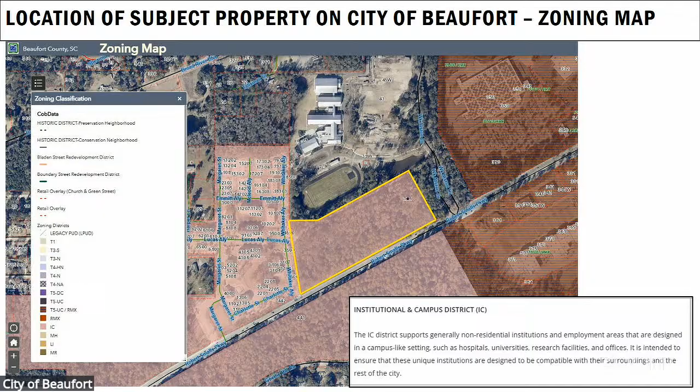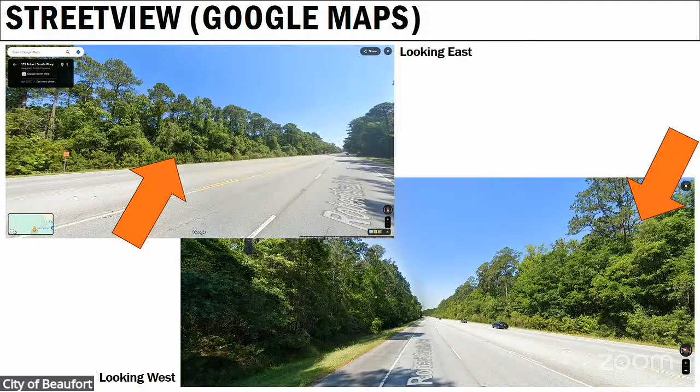Looking at the overall aerial from Google Maps, you can see it's undeveloped, still wooded in its natural state. To the north is the Robert Smalls Leadership Academy by Beaufort County Schools. To the west is W.K. Alston Drive, the primary access drive to the Academy. You see 4000 Margaret on the east, the Walmart on the right-hand side, and across Robert Smalls Parkway is Beaufort Station. Looking at the street view, it's pretty much undeveloped and wooded still.

Urban centers, by definition in the comprehensive plan, are intended to accommodate regional and community businesses and limited light industry. You can forget the light industry portion since we're in IC. You can also see compatible zoning districts under this urban center designation - the second most intense land use would be RMX, the T5 UC districts common along Robert Smalls Parkway, for instance Beaufort Station is zoned RMX T5 UC. So basically it is compatible with what the comprehensive plan envisions as land use along that corridor.

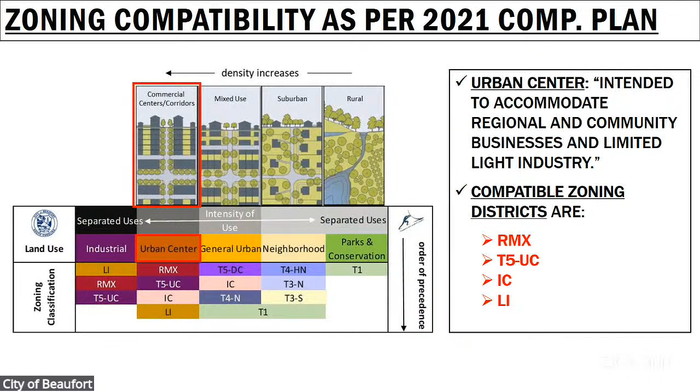Let's delve into the conceptual site plans submitted by the applicant. You can see the overall property boundaries here, and today's request takes up roughly, maybe not even a third, of those 14.4 acres. You can see the freestanding emergency department and the patient care clinic - the emergency department on the south, and the PCC, the patient care clinic, on the north. You can also see outlines of the access road system.

It's going to have direct access off of Robert Smalls Parkway on the south. The applicants, the property owners, will also create what I call a spine road, a connector road on the north side of the property, which will connect 4000 Margaret on the east with WK Alston on the west, as a secondary access road to the north.

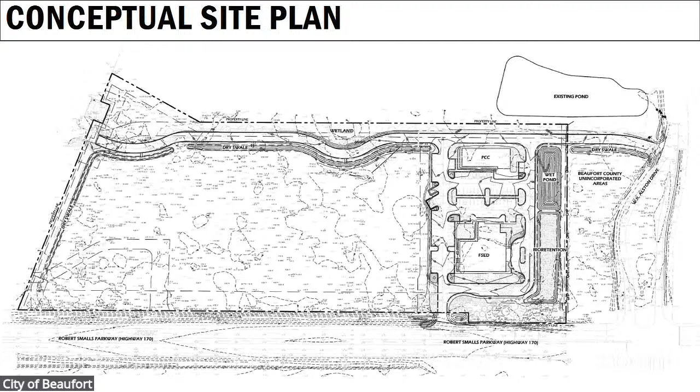There will be some questions about that because so far we haven't been told, or the applicant hasn't specified, that there is an easement or access easement, because that sliver of land you see on the east next door is actually part of Beaufort County School System. So Beaufort County Schools owns that sliver of land between the subject property and WK Alston. They're going to have to go over that, and I'm sure the applicant can specify that later on. Just to point that out, to kind of hone in on the actual project here.

Also, you can kind of see the landscaping that's proposed with it. So you see the two buildings. The southern building, the emergency department, is not faced towards Robert Smalls Parkway—it's actually facing north, towards the patient care clinic on the north. That's where the main entrance will be. In between those two buildings is where you have your parking, as well as on the west side of it. So parking is going to be on the side and in between those two buildings.

On the eastern side of this portion that will be developed, you will see retention areas and a wet pond for stormwater management purposes.

Also, what you can see here is the frontage buffer along Robert Smalls Parkway, which with our latest revisions to Chapter 5, now has options with the buffer type they can choose from. It used to be a 50-foot buffer. Now they can choose between option 1, the 50-foot, or option 2, the 35-foot, which is the scaled back buffer depth with more planting. The applicant has stated they are going with option 1, the 50-foot buffer, which has been commonplace along Robert Smalls Parkway. So that's what it's envisioned to look like.

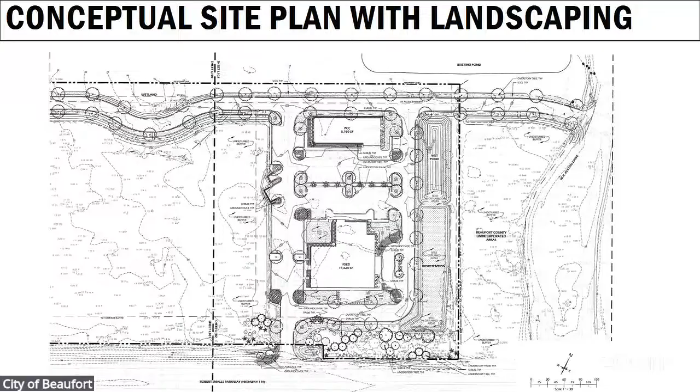This chart again states, under our now revised section 5.4.2, the front buffer requirement for this location. They are going with option number 1, as I just stated, which has more depth but entails less planting of overstory and understory trees and so forth, as you know.

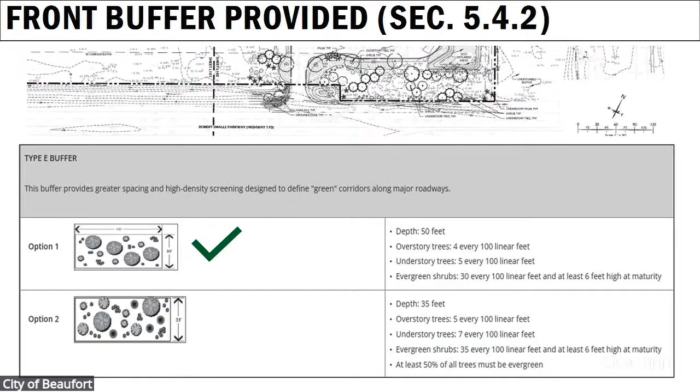The tree canopy coverage is also a new item we've introduced in our Chapter 5 revisions. They have outlined their existing canopy by the specimen landmark trees they are preserving on site, as well as the street trees and the landscaping that will be planted on site.

Looking at the canopy coverage for the 30% minimum requirement for commercial projects like this, they actually exceed this by far, because their calculations show a 55.2% tree canopy coverage percentage.

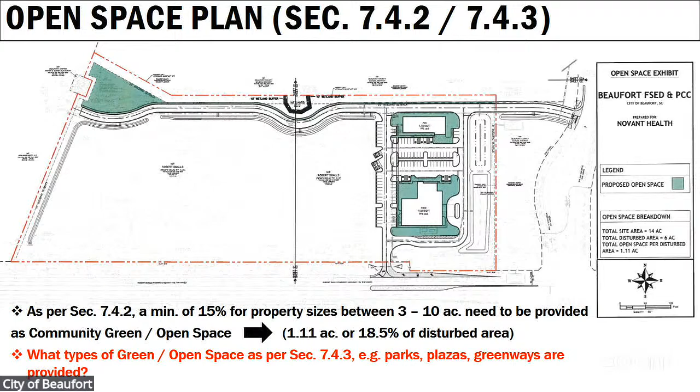The only thing missing, and please keep that in mind, is that we don't have any other specifications about the types of community green space or open space that is provided for. We only see where it's provided for, the location of such.

Going further into details, with the sketch plan requirements per our new section 7.5.3, we have 5 criteria we look at for sketch plan submittals: a street plan the applicant needs to submit, a community open space plan which I just talked about, a requirement to show the pedestrian network meaning location of trails, not only access roads but a trail system for pedestrians and cyclists, and they need to clarify their zoning as well as their design, including conceptual building design and massing.

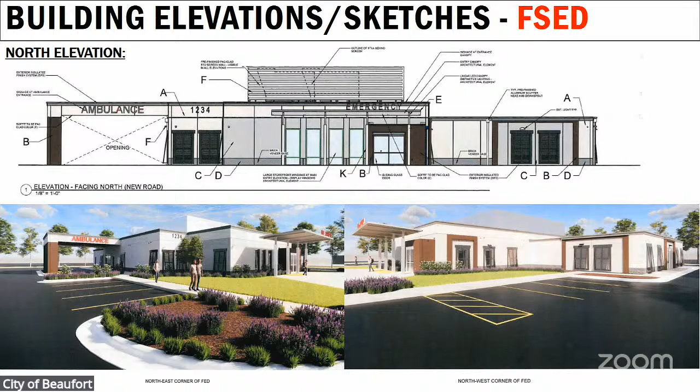From what our architects at Emitters told us, our understanding is that these buildings will be built basically from pre-manufactured elements - building elements put in place and assembled on site, so they're put together made out of pre-manufactured elements. What about precast concrete? That's our understanding, yes. You can ask the applicant, but I believe that's the case.

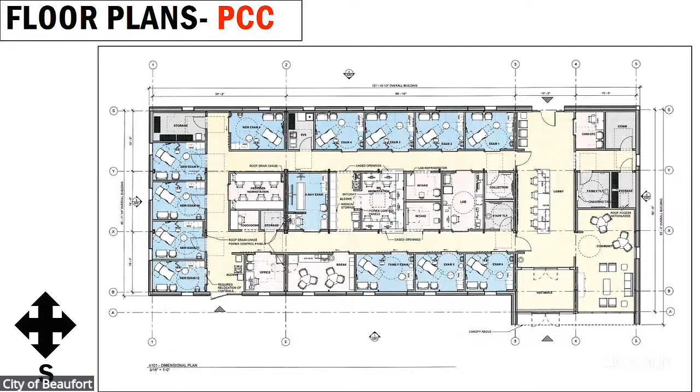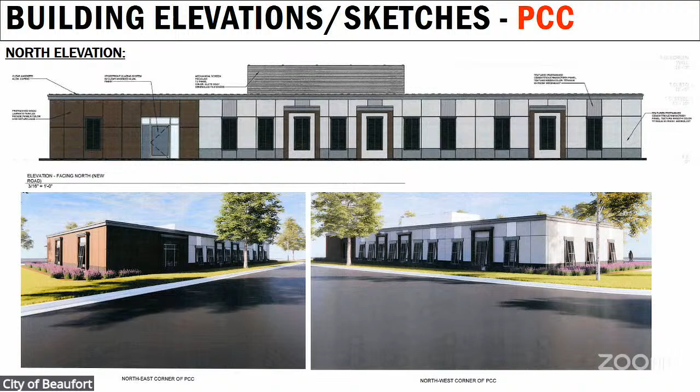So they change the northeast corner, which is kind of that brownish facade color, and it changes over to that more white, gray, white checkered pattern on the west side. The windows have Bermuda shutters in front of it. You can see that clearly here on the northwest elevation.

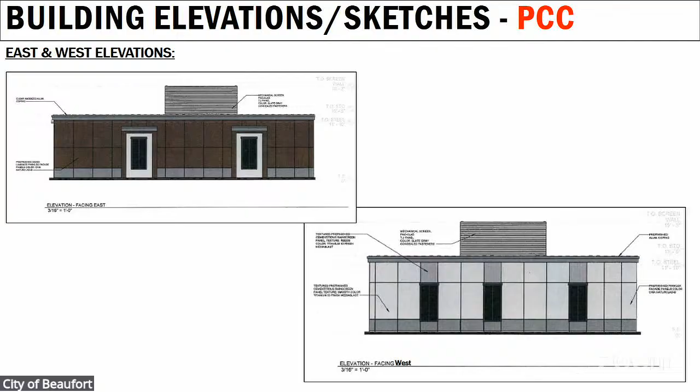So the east and west elevations, the side of the buildings, look like this. On the east side it's more brown, not very crazy architecture. Then on the west you see more of that gray, gray panels over the windows with the Bermuda shutters, and then you've got the white.

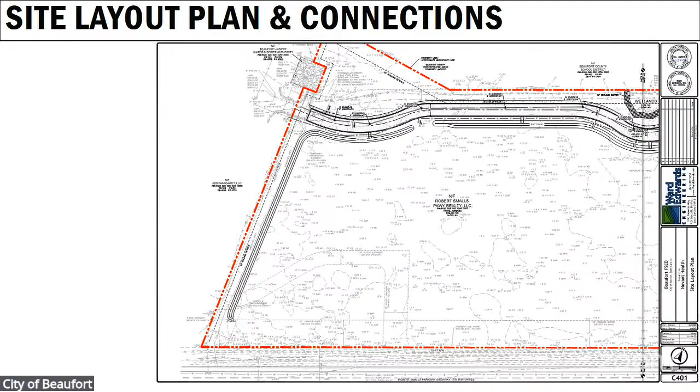towards WK Alston, which is something that we like to see. We like to see connectivity. We like to see, if there's street stubs present, that new development ties into surrounding communities and developments that are already in place. So they are doing that, which is very good.

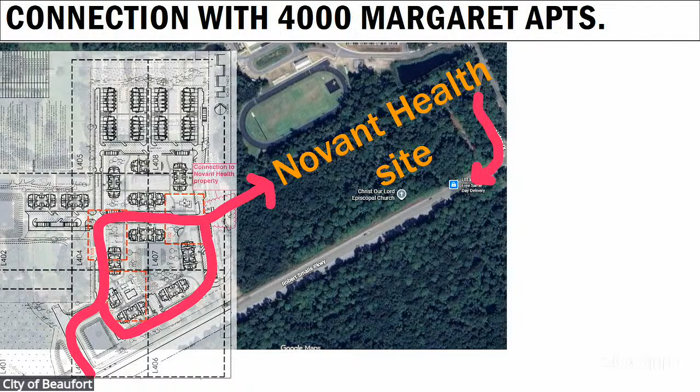Another look of what that would look like here: the apartments here on the north, and then the new development, the healthcare site on the south, with the pump station there on the right.

Basically, this is Matthew Michaels, the leading engineer for Beaufort Jasper, and this pretty much confirms that there's capacity there. Yeah, I think the other issue is the letter itself in the body only refers to the freestanding emergency department. It does not refer to the other building.

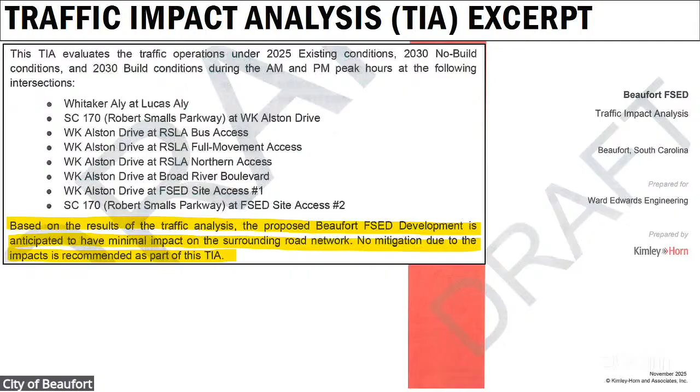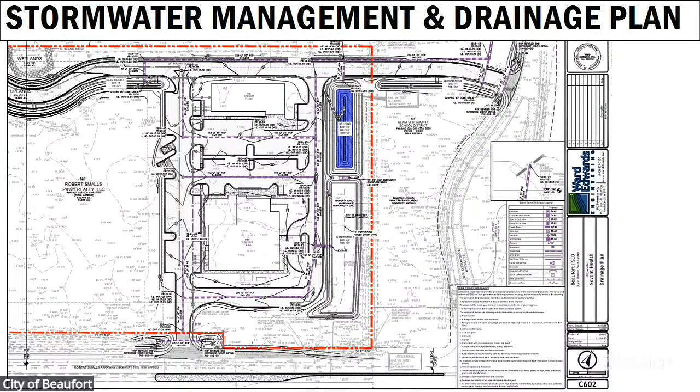The utilities, the water and sewer look— Can I ask you a quick question on that? Yes, sir.

So the bioretention overflows to the adjacent wet pond via an emergency weir at an elevation of 18.75 feet. The wet pond stages to a maximum elevation of 18.58 feet, which is below the emergency weir elevation. Therefore, it will not backflow or saturate the bioretention. So flow is directed towards the north and then goes out. If that overflows, it goes into the control drainage structures.

Yeah, that's a really steep slope in there. I don't know, I really didn't—usually it's stabilized, but it's only a sketch plan. The specifics—we work with Jason Hedrick when it comes to stormwater management, and we had provided the applicant with comments, which they basically elaborated on, and I'm sure they can do that better afterwards as well.

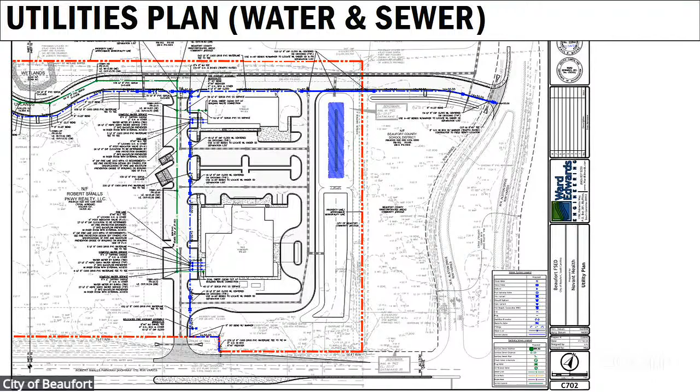But this just highlights how that is going to take place, as well as the water and the sewer, which you can see here in the utilities plan. As I stated, the sewage will flow towards that pump station at the northwest corner towards 4,000 Margaret and will tie into there. The water line, shown here as the blue line, follows the spine road, the connector road, bringing the water from WK Alston and taking it towards 4,000 Margaret, tying it into their new facilities to the south.

Last but not least, we come to the finding of fact section. We analyze four facts. Number one is the land use mix within the project, whether it conforms to Beaufort zoning and the comprehensive plan, which I showed you in the beginning—the future land use map and its goals and policies. Yes, if that checks off, both the comprehensive plan and the current zoning meet what we would like to see within the IC zoning district as a healthcare facility along that location.

Number two, the sketch plan is consistent with the rationale and criteria set forth in this chapter, the city's comprehensive plan, and the civic master plan as amended.

Looking at those, there are some items that we haven't really seen or would like more elaboration on. One of those, if you look at Appendix C of the Beaufort Development Code, studies what kind of desirable street sections you would like by typology, and gives a description of Robert Smalls Parkway and what the city would like it to be developed to when it comes to development along that corridor. One component within that street section is a multi-use path for both cyclists and pedestrians.

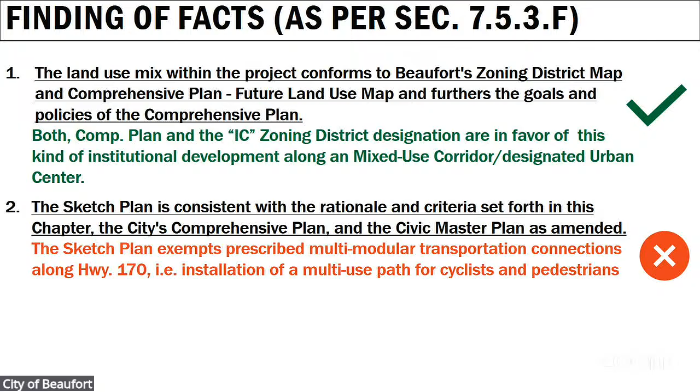So we have not seen any of those multi-use pathways along Robert Smalls Parkway in this sketch plan. It would be nice—I will refer to the applicant on that—but that's one of the items they have not really touched on.

Number 3: preliminary traffic, open space, parks, utilities, pedestrian design—are those adequate? Are they functional given the planned capacities of each system, and do they meet the standards found in this code? There are items that have not been provided for, as I just stated: the multi-use pathways and connectivity to other means of transportation, like pedestrians and cyclists, are not necessarily all there, or may not be adequately provided for.

That's also true of the Spine Road potential—not only connecting 4000 Margaret with WK Alston, which is basically an access road to the Leadership Academy school, but providing that not just as a transportation road for cars, but also maybe highlighting more access for cyclists. What about trails, greenways, and so forth?

The other item I highlighted was the missing easement clarity. Is there going to be an access easement for that small section to tie the Spine Road into WK Alston? That is still unclear—we don't know as of today. I'm sure the applicant is able to elaborate.

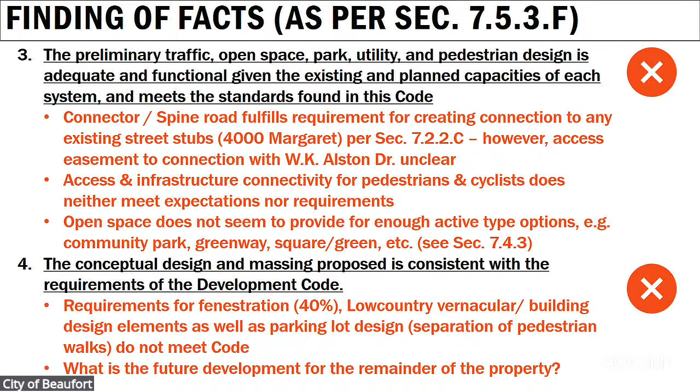Open space: the open space plan doesn't really show any decipherable types that have been chosen. For instance, is there any active open space provided, like community parks, a square, a green, or maybe a greenway as an open space type for this development, in conjunction with the residential and schools and so forth.

Number 4, finally: the conceptual design—is the proposed massing consistent with the requirements of the development code? Well, the massing is underutilized. Both are just one-story buildings, which is fine—if they don't want it to go up, then they don't want to go up. But looking especially at building design criteria, what we always like to look at is the fenestration.

What do they have to provide for? Well, 40% in the conventional district for IC. The transparency does not necessarily meet that criteria. We would also like to see 40% on the street-facing facades—any facades that are street facing and prominent should have that 40%, and it should be true fenestration, transparent fenestration that allows an interactive relationship with the building. We don't really see that. So if I'm in the exam room with the doctor, it should be an open window.

I mean, 40% is about half of the building wall. How is that going to work with a building where you're going to have people being examined by doctors? I'm just standing there pointing it out. But that's a good take, a good argument. At least I understand what the code says, but in this instance it doesn't seem to make a lot of sense. No, of course. Anyway, I'm just putting it out there, right?

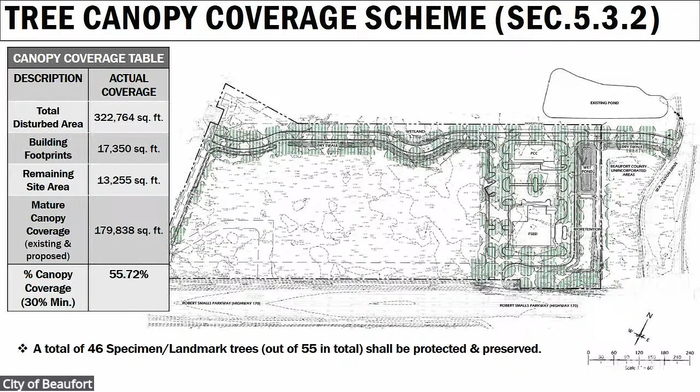Any other questions? Has the connector road from this site to the WK, has that been dedicated? We don't know. Is that now part of this project or is it not part of this project?

Well, the connector road is part of the project, so they are proposing to connect WK Alston on the east with 4,000 Margaret on the west to have that also as a secondary access. They're proposing it, but do they have legal right to do that? I think from what he said earlier, the staff doesn't know. No, we don't.

Okay, I just wanted to make sure that's still the case. So is that still up in the air? You just don't know? I'm sure the applicant can probably talk towards that.

Okay, and one last thing, and I don't know that we have this implemented now, but we had asked to try and get some type of a look at a master plan where you take this site and all the other sites and kind of look at a master plan of what the impact is of this site combined with all the other sites. And I'm not sure if we've accomplished that yet with everything.

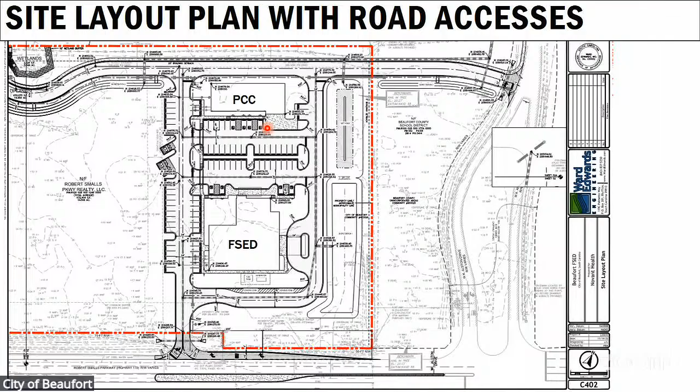Christopher has provided you with a list of a lot of comments about this from the technical comments on the addendum, and you'll notice there were comments about what Benji stated. I think the important thing is you see the overall - this is conceptual, right? So there are some issues here that you're seeing, but we're getting into some specific details that a site plan would have to lay out. But the goal of this is to tell them, hey, looking at this conceptual plan, the way you're orienting this building and its massing, its scale, its relation to Robert Smalls Parkway is not working for us.

Hey, your parking lot design is not working for us. Instead, this is more conceptual - let's not get into the fine grain details, let's think about it in general. I agree, I just wanted to say that because that's the goal of this meeting. So, sorry - why don't we close this and open it up to allow the applicant to make their presentation?

Good evening. I wanted to thank the Planning Commission for having us this evening. I'm Adam Pegan, I'm the Senior Director of Planning.

Could you say your name again? I couldn't hear it. Oh, I'm sorry, Adam Pegan, I'm the Senior Director of Planning. How do you spell your last name? Pegan, P-E-G-A-N. There should be a sign-in form for you to sign in and put your name in. Yes sir, thank you.

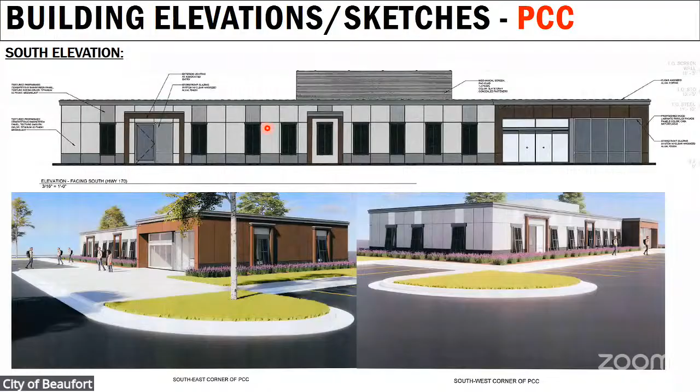It's an interesting concept to me, but I want to make sure we're helping to make it work right. You actually have the same... I'm not as concerned about your urgent care or the emergency room, more concerned with whether this has been in operation in other locations and been successful, is what you're saying.

Yes sir, like I said, just down 170, Tidewatch Freestanding Emergency Department, we've been operating since 2019. Oh okay, well that's a good amount of time. That's real interesting to me.

Mr. Chairman, I have one more question. What is the relationship, if any, between the patient care center and the freestanding emergency room? Is the patient care center providing follow-up care for people seen in the emergency department? Is it primary care? Is it urgent care? What is it? Yeah, so the intent is it's an office that can be used for a variety of different things.

The intent right now is to have it as primary care. We find that a lot of folks in the area don't have a primary care provider. We've recruited a number of providers recently and plan to recruit many more. Oftentimes we see patients where their first interaction with healthcare is unfortunately at an emergency setting. So if they would be willing to choose us, we would have a location across the street able to take care of them. But it is intended to improve access to healthcare in general.

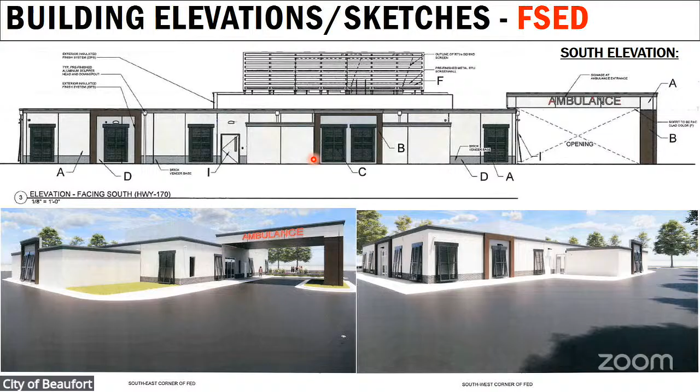Floor plan back up, please. Service yard is right here. So the service yard is facing Robert Smalls Parkway. This is the south elevation. So the service yard would be in here, okay? Right here. Could you put the floor plan up?

So this is facing south up here. This is the service yard area. So Robert Smalls Parkway is up here. It's turned around 180, so...

I personally think that's a great idea to move that front entry toward Robert Smalls, kind of in the corner of that Robert Smalls, and have that service yard in the back. So flip the building 180? Flip it. Yeah.

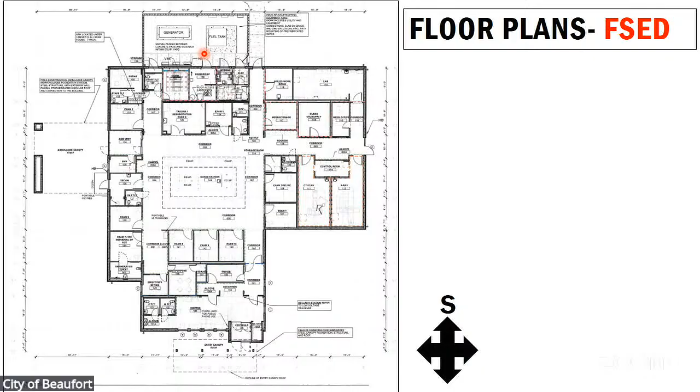Well, I think we're getting into some manipulations we don't need to get into right now. I think we've given you a lot of comments. Hopefully you've taken some notes. I guess at this point, the staff's recommendation was that we may want to just table this. I guess asking the applicant where you stand at this point, would you rather just take these comments and come back with some new information that can answer a lot of these questions, and just come back as a sketch plan review again.

I think we understand the impetus behind a lot of these comments. We would love to move forward and work directly with staff towards the next meeting, in which we'll have everything, a refined set of floor plans, all the building elevations at their current state, such that next time you see it, you can see everything and we can talk with everything in more depth, and have those conversations with staff in the interim. So ideally, we'd like to move forward knowing regardless of the sketch plan, we'll still come in front of y'all again. So if at all possible, we'd love to take these recommendations, work directly with staff, and then come back as a full submittal. There's an awful lot here on the table, especially getting your authorization for your access road and all that, which is a pretty big deal.